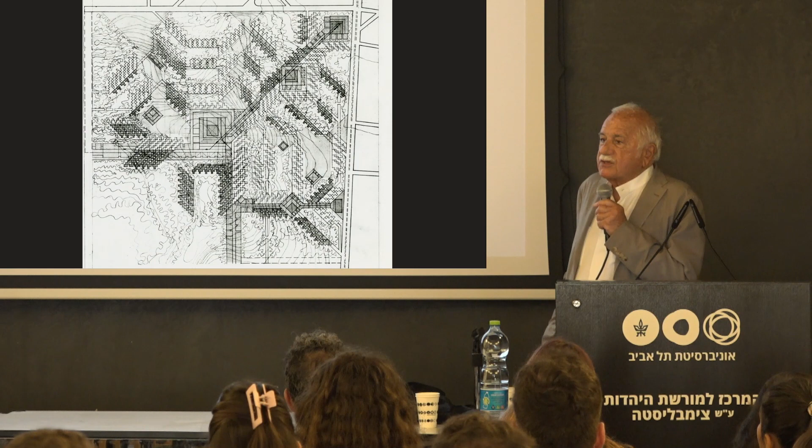This is a meeting in Washington with all the VIPs of HUD, Housing and Urban Development of the US, and we began working on a site in Washington, a hilly site, in which I decided to try and build within 12 stories prefabricated modules. They would be smaller than the Montreal project and lighter.

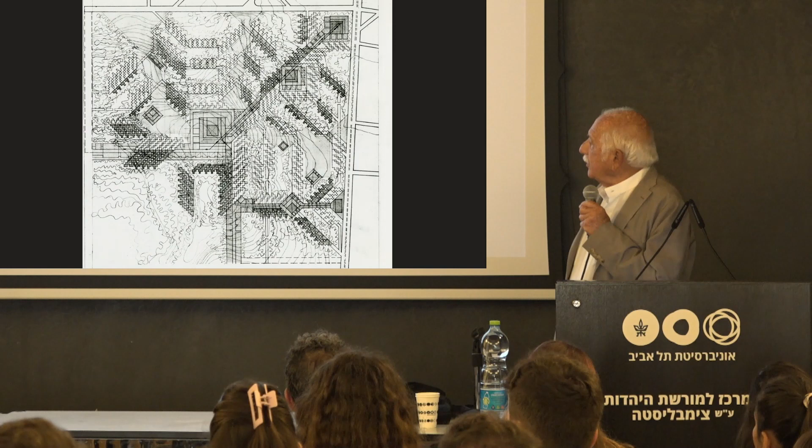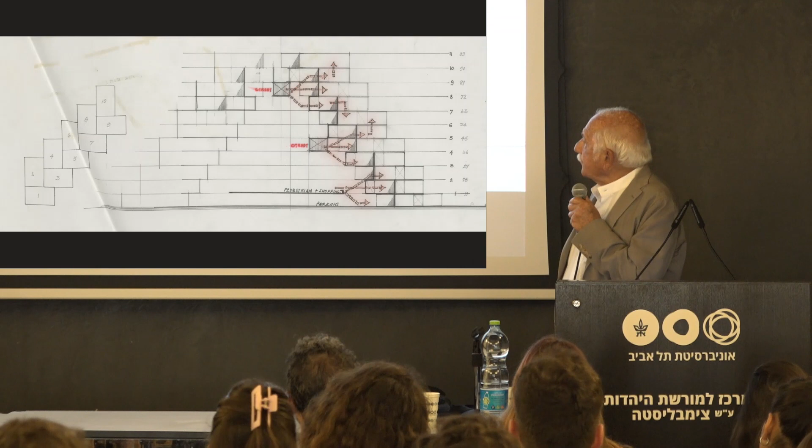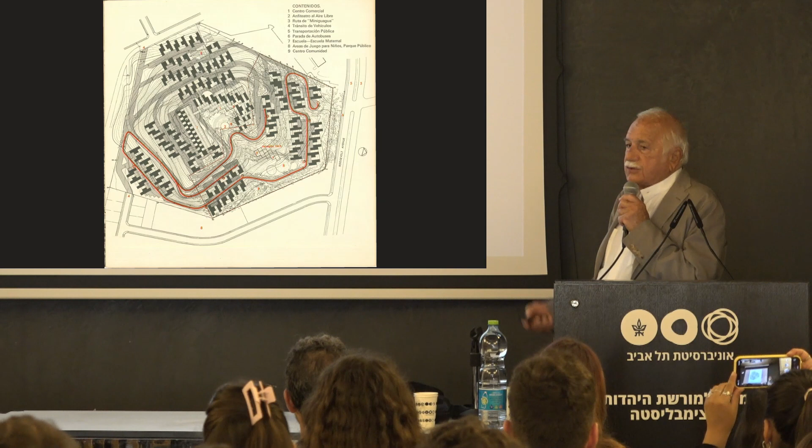Here I developed a split-level module. The walls of the boxes were 3 inches, even lighter. This is the site plan as it rose up the hill. Here we had the advantage of the topography, so we didn't have to really build. You can see the section, cutting the hill so that you have the access roads. And then basically it's a 4-story building climbing up the mountain.

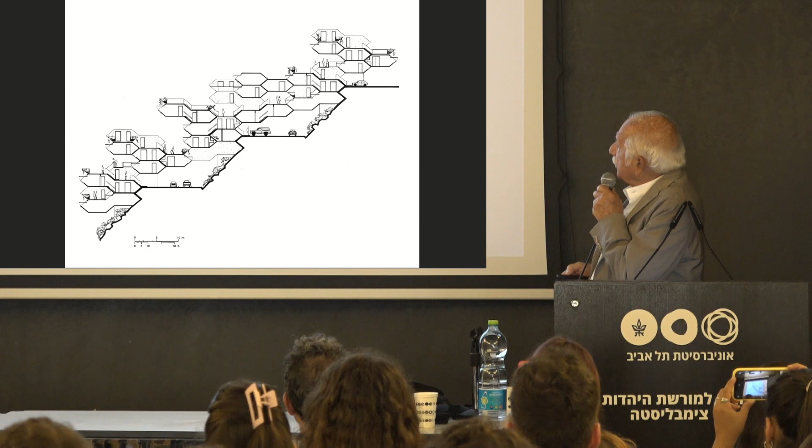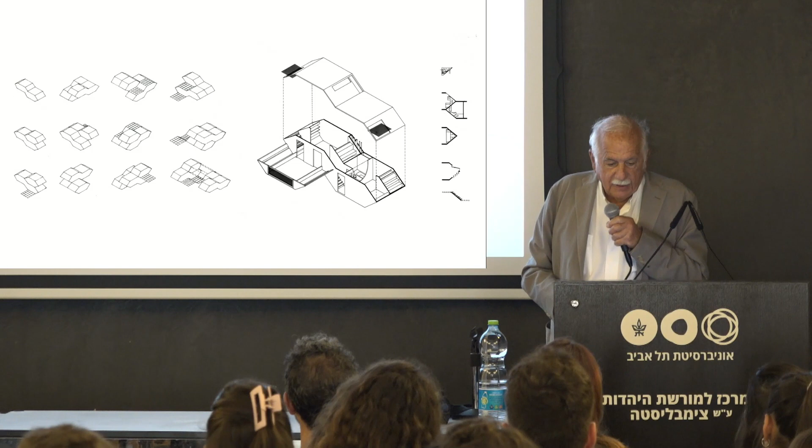The modules, the terraces, and the variety of apartments - everything was split level. How in our right mind we thought we could impose on hundreds of families to live in split-level housing is a testimony to our vanity at that point.

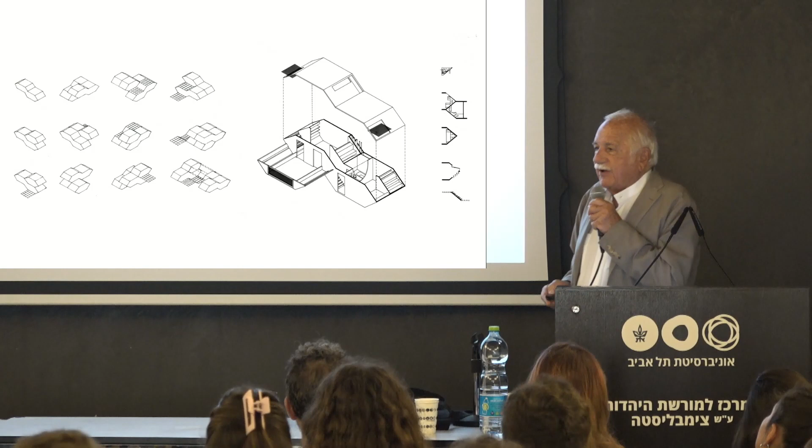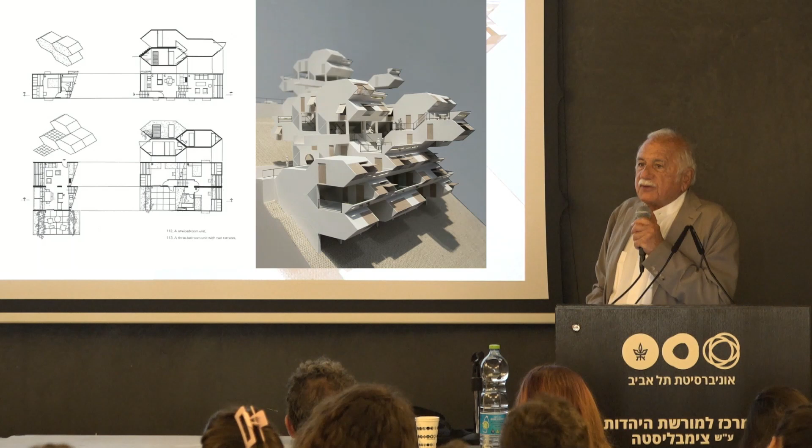There was something relentless about it, I would say. But the cluster was very seductive. Everybody has a terrace, some of them recessed. It's all designed to respond to the tropical climate. Everything is shaded. We thought we have a winner.

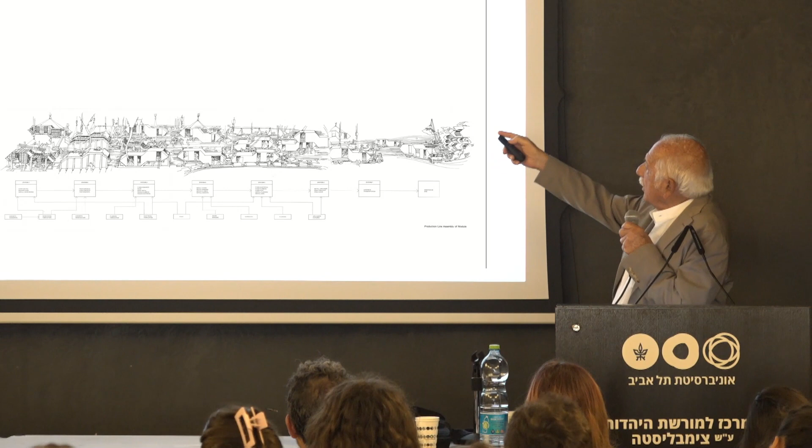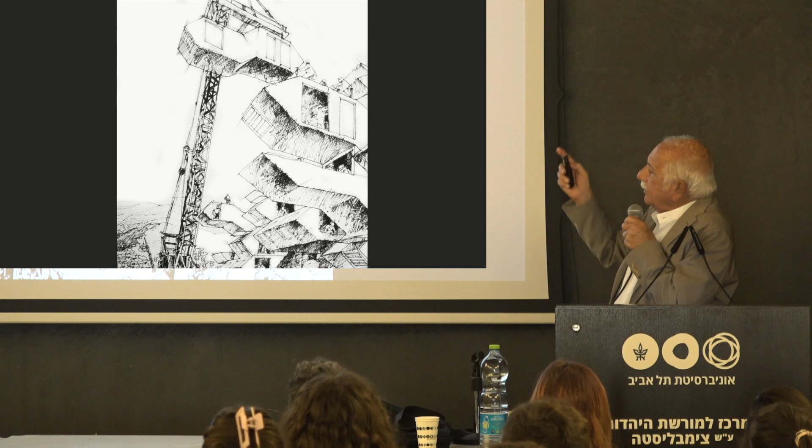So did the developer. We set up the production line, the factory, how everything would be assembled, the installation of all the components, lifting the units by simple cranes because they're only 30 tons - you could ship them by barge. And they started making boxes, producing and assembling them. This is the archaeology of that project.

So what happened? President Nixon of the United States and Romney had a fight over integration of housing - nothing to do with Operation Breakthrough, but Romney resigned or got fired, I don't know the full story. And Operation Breakthrough collapsed, so both the Washington project and the Puerto Rico project collapsed because all the federal funding for that research disappeared.

In '67, I was invited to the Congress of Architects in Tel Aviv right after the war. I was received by Mordechai Bentov, who was Minister of Housing, and Teddy, who at this point was the beginning of a long friendship. And we were commissioned to design a habitat for Israel.

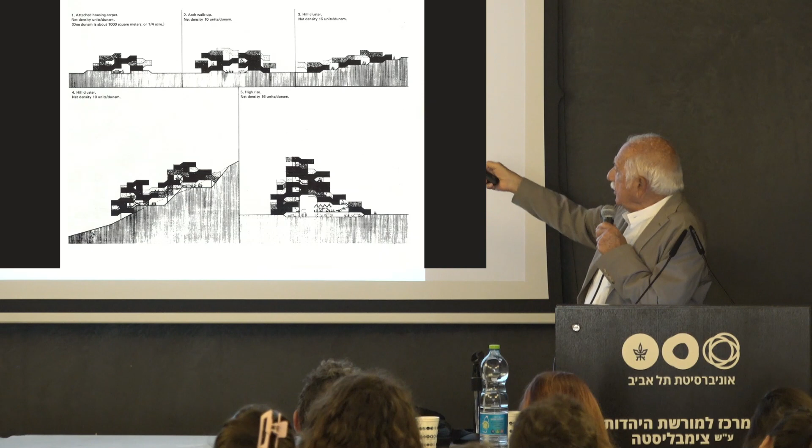The site was next to Manchat, the hill in Jerusalem. We developed a similar module, although here we developed a component, a system that could go from 3 stories for medium and low density to 12 stories. And we developed this window that could cover the terrace for winter or open it for summer.

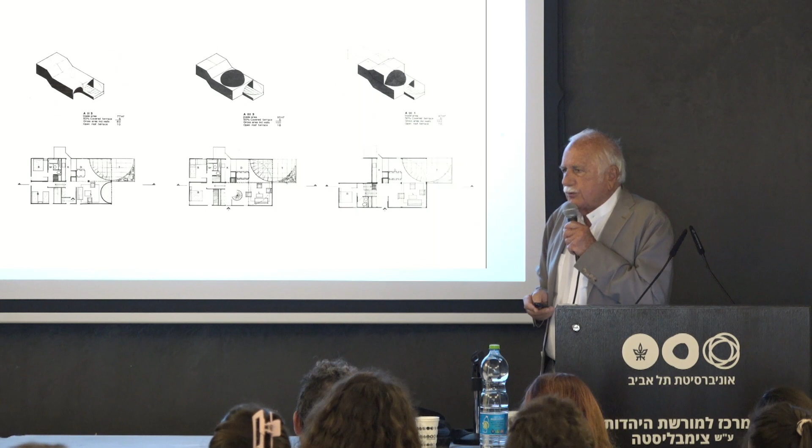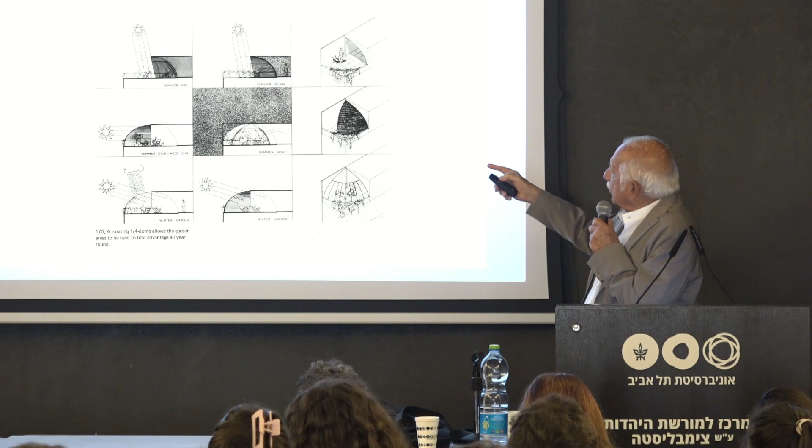You see here the housing types, and a whole team of engineers came to meet with, I think it was Ashtrom at the time, to set up a big factory. Here are the components of everything, and the window that allows you to shade it, enclose it for winter, or open it.

The only one that ever got done is in my apartment in Jerusalem, which you see here. That's on the hill of Manchat, something like 1,500 units. And that did not happen, primarily because at that point all the energy went to the neighborhoods outside the expanded city limits, to Ramot and Gilo, and Manchat was within the Green Line, so it did not have priority. Then the government changed, Bentov departed, and this remained a dream.

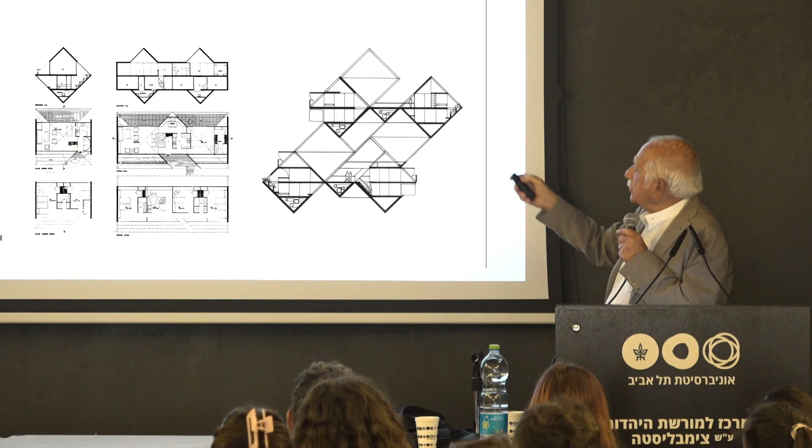Here we're looking at a steel module. There's the site, along the water and the highway, bridging over the highway. These modules were to be steel, so they could be lifted and brought by barge, so the size was less constrained. Large units, this was supposed to be a luxury project. We worked out all the details, very exciting, we thought, and that did not happen.

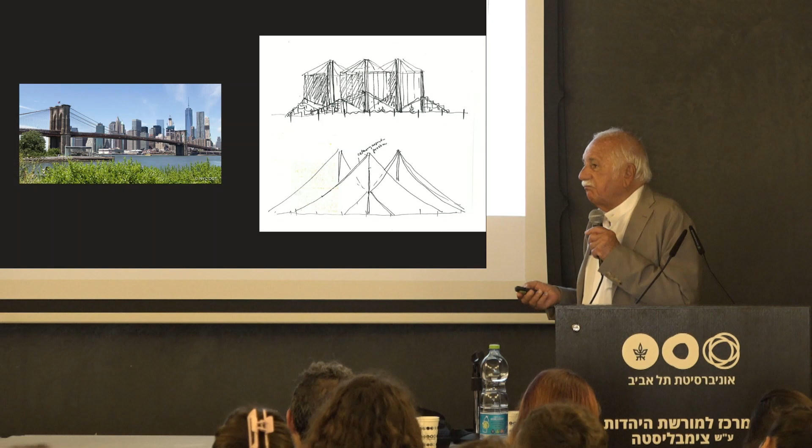Then Mayor Lindsay said, I have a site on the south near the Brooklyn Bridge, also over the water, and we thought, let's try suspending the modules so they have no weight to carry except themselves. They'd be much more standardized.

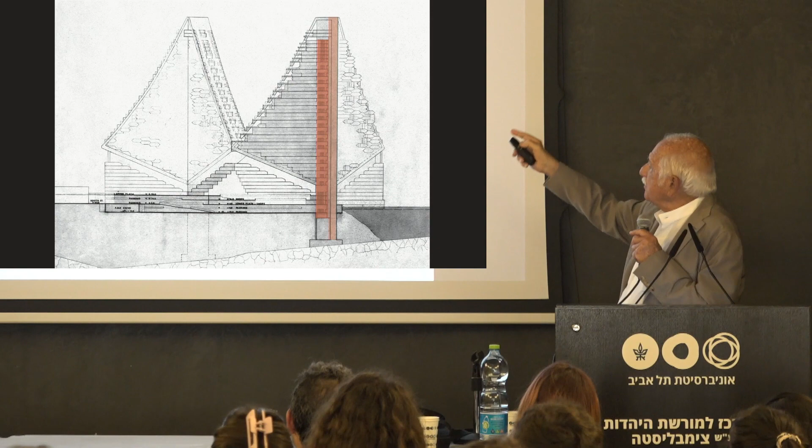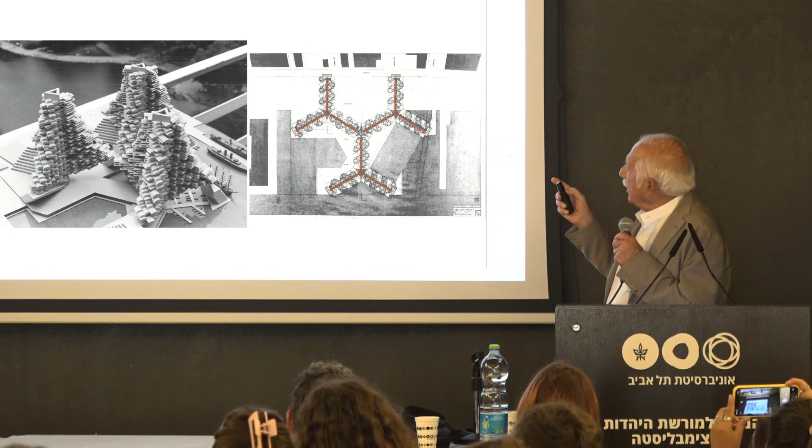So there are 3 pillars. There are cables suspended between them, appropriate to the Brooklyn Bridge. The modules, you can see, are lifted and threaded through. This isn't showing exactly the details, but the early model.

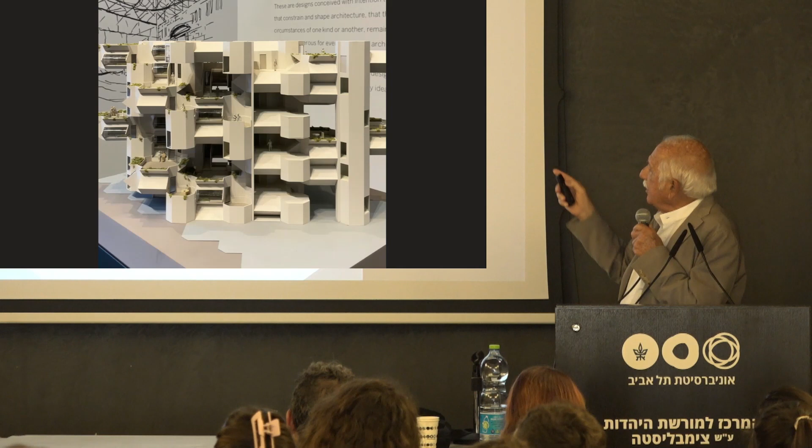And then we actually, you can see here how they balance each other. The typical unit, and a more detailed model made recently for an exhibition, shows the modules as they are hanging, 2 types of modules making up the whole clusters. That's a more recent model showing the whole system with the cables.

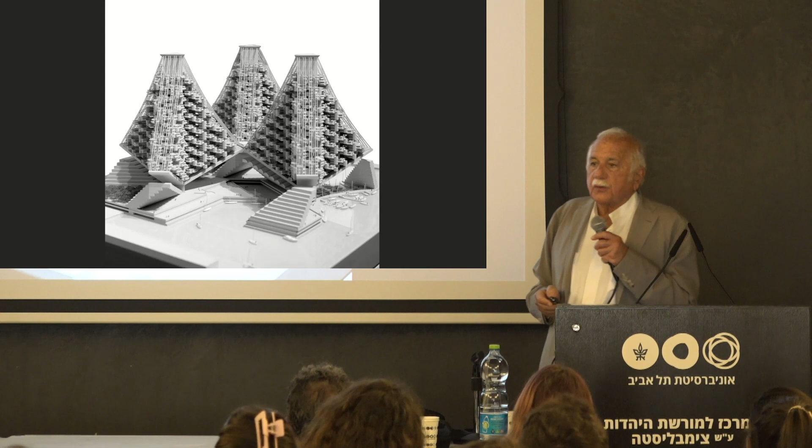Actually, this was engineered, and we went into great detail. I worked with T.Y. Lin, who was expert in suspension structures.

Everything was an issue. The unions were an issue. The building codes were an issue. And slowly we began to realize that what you could do in a World's Fair doesn't exactly happen in the world outside the World's Fair so easily.

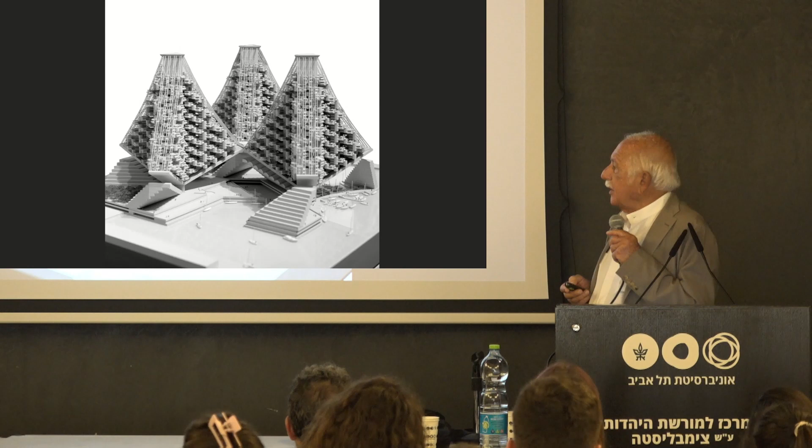You can see here the texture of the modules and the cables coming through. Audacious, but a bit beyond the capabilities of either the industry or the market. So it was clear that we were pushing things too far.

But then, at that point, in the late 1970s, any kind of housing, there was a recession, and there was hardly any new initiatives in housing, either public or private, certainly not in high-density housing. For the next 10, 15 years, you couldn't find a building done by an architect that was really a high-rise apartment. It really happened much later when developers discovered it's worth hiring architects with reputation to do apartment buildings and housing.

But I realized at that point, and I want to talk about the cost of fractalization. What do I mean by fractalization? The conventional apartment building is an extrusion.

And the reason it is an extrusion is that it's the most economical way, minimum envelope around the mass that you can have. Even balconies are kind of an intrusion on the extrusion. So if you want to create a form that is the most economical from the point of view of just construction, you extrude the building. You don't come in, you don't come out.

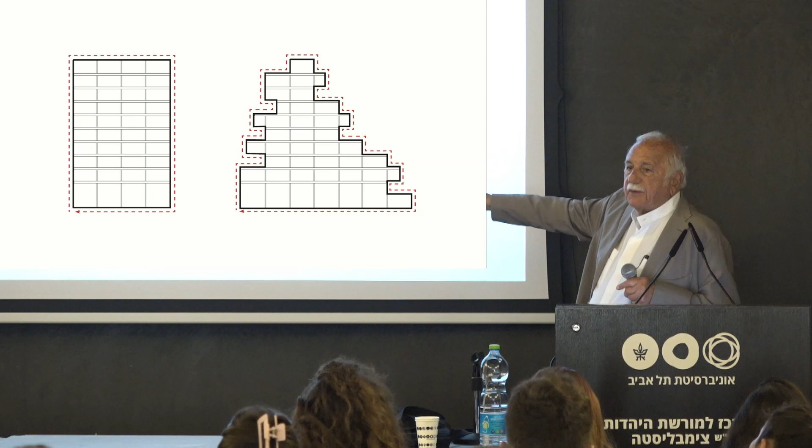I met at that point, in 1980, Mandelbrot. Mandelbrot at that point invented the mathematics of fractalization. Basically, I'm showing you a diagram that's architectural. You take that extrusion and you do what we do in Habitat, and you're getting more surface, more underside, more insulation, just more surface. So fractalization does not come free, and that is important to remember.

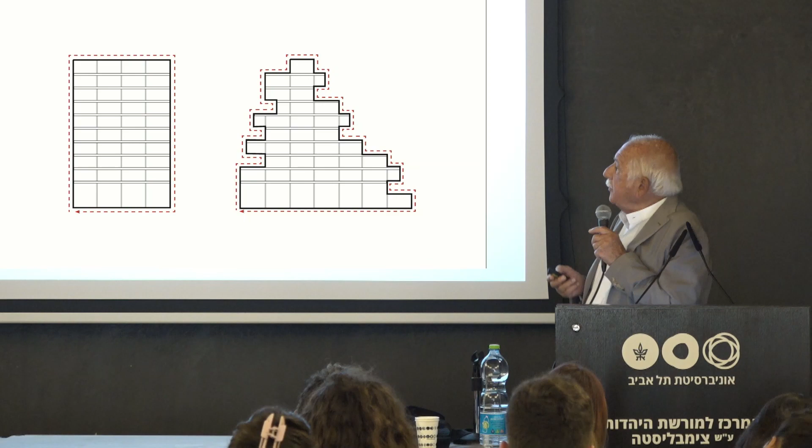These are amazing. Anybody know the term fractalization? Is that familiar? And Mandelbrot, familiar? He developed that, and we immediately recognized the connection between what we were doing and this amazing world of chaos theory and fractalization. So it's very important to clarify.

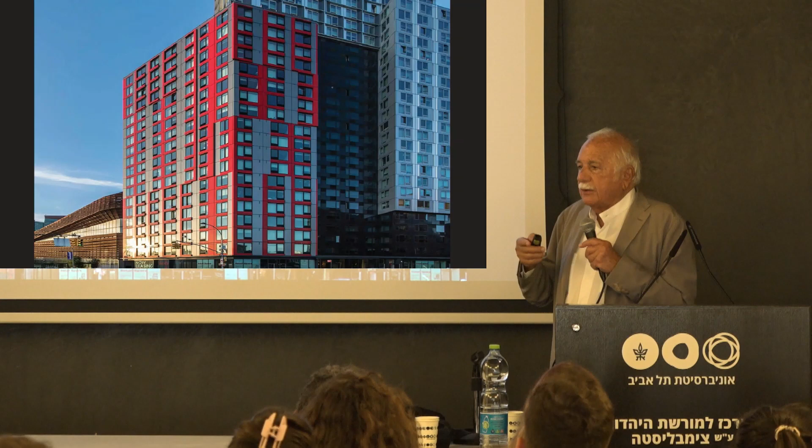You can have prefabrication, modular, factory-produced modules like this and create this kind of building. So modular construction does not mean necessarily a building that has gardens and terraces and so on. You can do either.

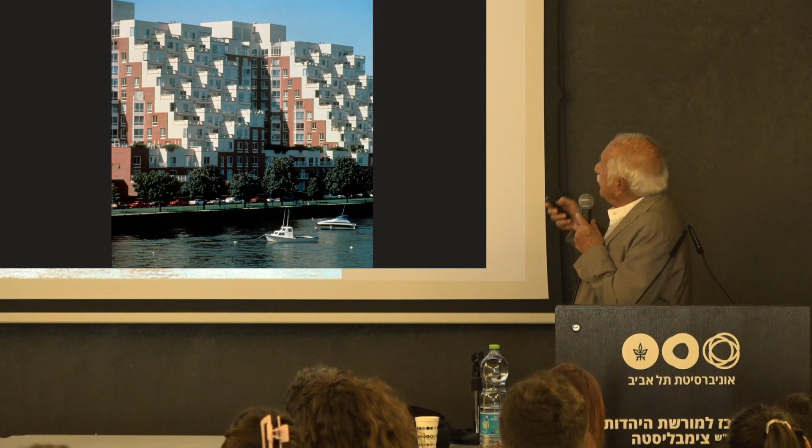In reverse, this is a building I built in 1980 in Boston, an apartment building on the Charles River. This was totally conventionally built, like any apartment building, concrete, conventional construction, but it has terraces and it's fractalized. It was done in the framework of a developer, for profit, but it's not modular construction. It's conventional construction with innovative features in the design.

It's interesting that just as I finished doing Habitat, several architects started doing things similar. Paul Rudolph was the most imaginative.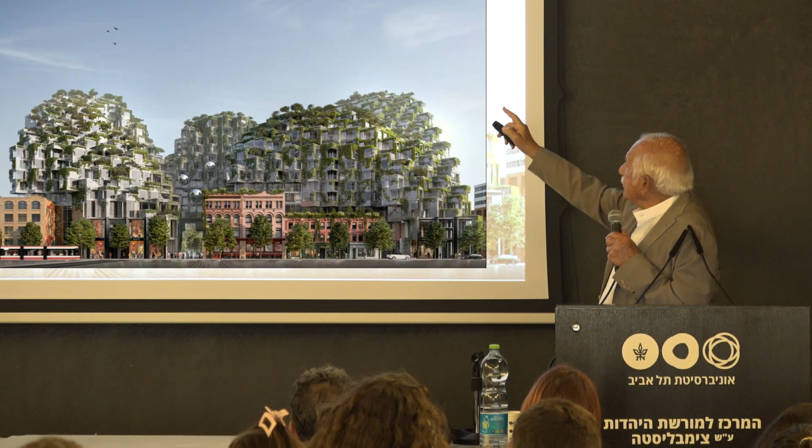And this is more recent. This is Bjarke at BIG in Toronto. He calls this Habitat 2. While this looks pretty good, you know, terraces, gardens, and lots of green. Whether it's going to grow in Toronto or not is another question, but lots of green.

But if you look at the plans, and I recommend you look at the plans, I'm not going to show them, it's a long, long corridor, square, with some nice apartments on this side with gardens. And on the other side, you have apartments looking into the courtyard. And instead of streets, you have these long, long, long corridors.

And so this brings me to the question of equity.

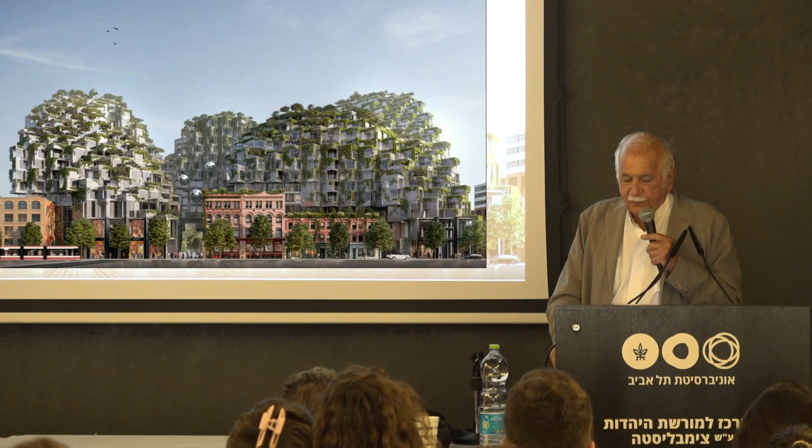Equity, I mean, when you design a building, particularly housing, it's very easy to produce a complex where you have Class A space, Class B, and sometimes Class D and E. And when I look at recent plans of famous architects doing housing, I'm not talking about the run-of-the-mill stuff, you often see an absence of equity.

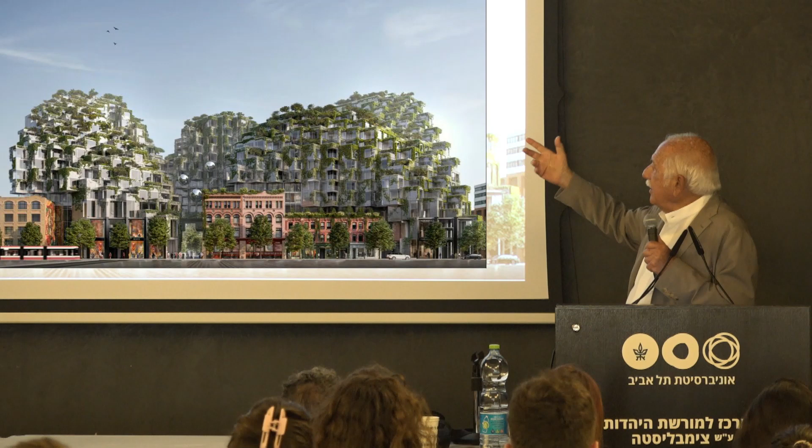One of the things that drives me crazy is to see a building such as this, which actually has some wonderful features. By the way, this is conventionally built, and it's now being built, that 50% of the units are really not wonderful at all. So I urge you to have that in mind. When you design a complex, equity becomes a big issue.

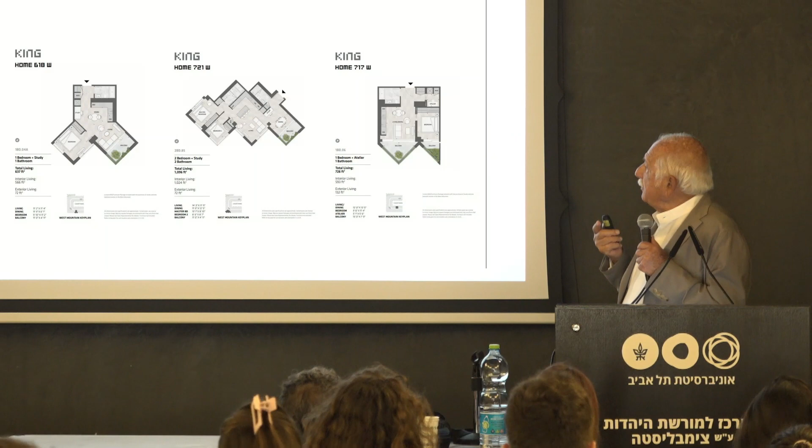These are the apartments of this project. And I didn't show you the plan as a whole.

So by 2009, after 20 years of doing almost exclusively only museums and libraries and courthouses and Mamilla and Yad Vashem and this and that, we said we have to come back to the subject of housing.

We have to come back to where we left Habitat and see what we might do. But I realized that doing so with clients is not going to go far because we had no clients. And so we set up in the office a research fellowship. We had 3 architects assigned to it, actually from outside the office. We advertised and got 3 people from outside the office, and then worked with other people in the office.

And the criteria was the densities of the 21st century, densities of Hong Kong, and this is, again, Hong Kong and Singapore, the densities of the most dense cities, the mixed-use issues. And after a year and a half of work, these are all the models we made in the research fellowship. And I'm going to show you 2 or 3 of the systems we selected as the most promising ones.

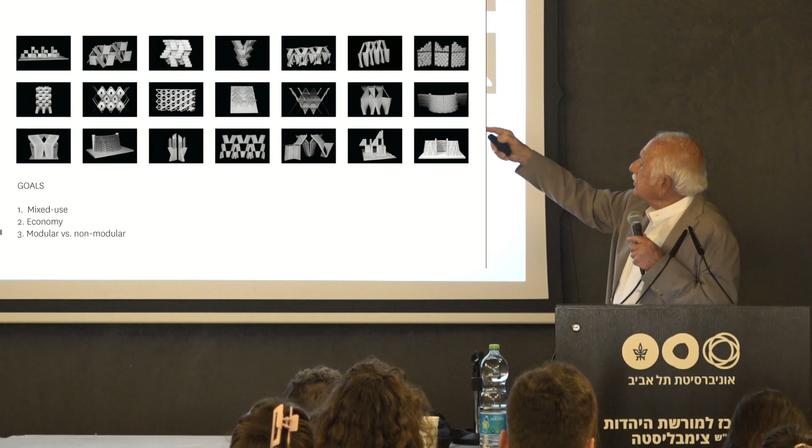Each had a different criteria. But these are all the models and all the systems we developed in some detail, and we got all our engineers to volunteer their time and work with us on it, so that we had also the technical input to make this for real.

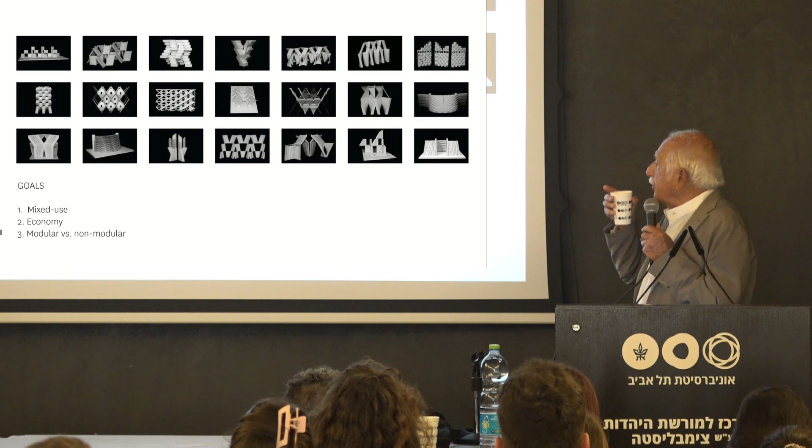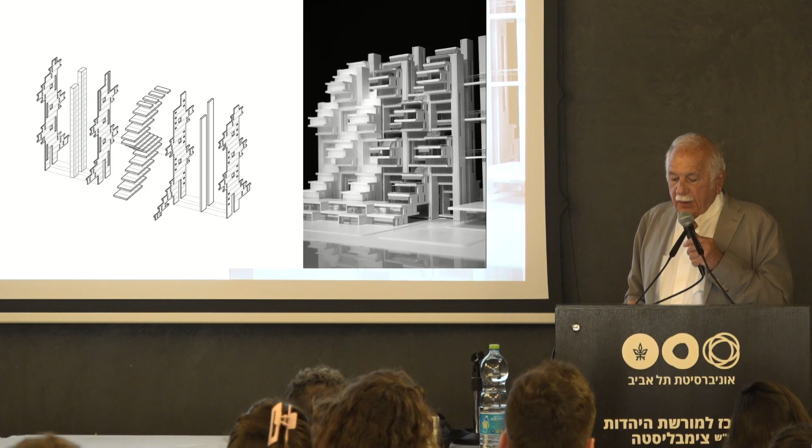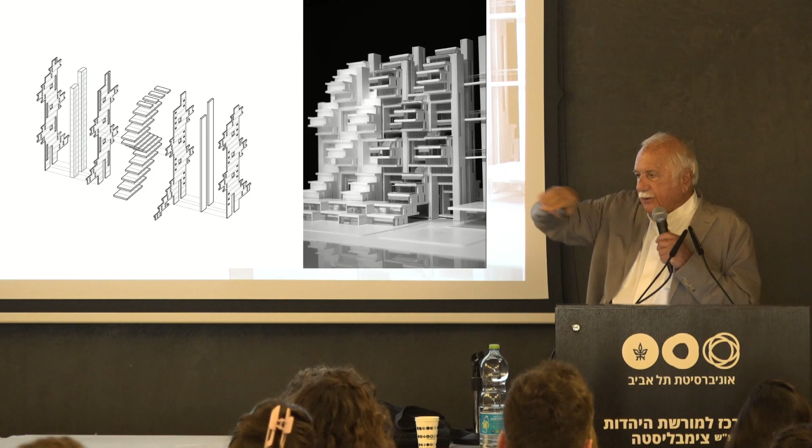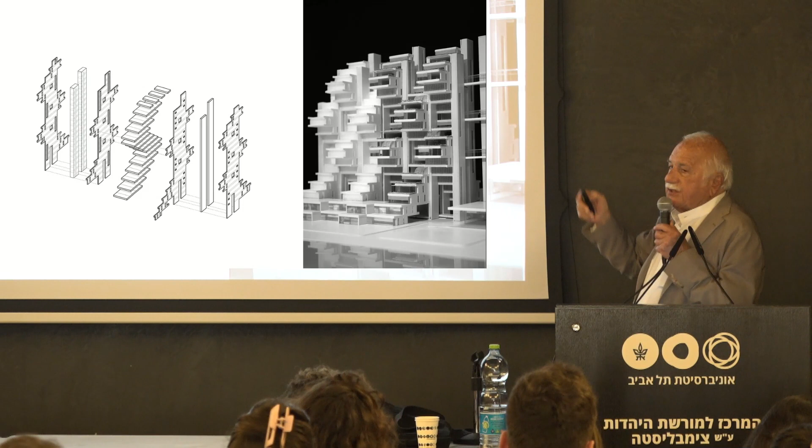The first study, we said, let's simplify Habitat to the point where all the structure is vertical and all the plumbing is vertical. Let's not do this, this, this, this. Let's go vertical, but we are able to go in and out, cantilever in and out of the structure. And we placed pedestrian streets every 4 floors, as we did before.

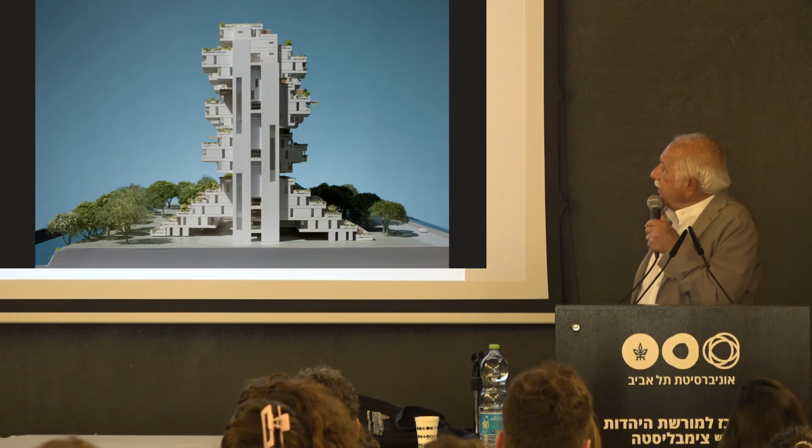That's the profile of the building. And we said, well, all the forces are going to the ground, the plumbing is going to the ground. We're achieving here great economies over the original prototype, but every unit has a garden, and we have multiple orientations, which is maybe a compromise, but acceptable.

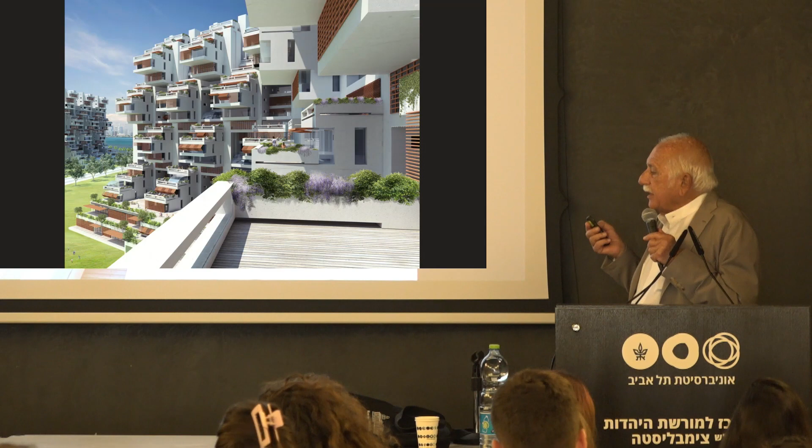And we have a great diversity of units possible, and that's the building that came out of it. And you can see that it texturally and in terms of the availability of outdoor spaces and so on is very much like Habitat, but it is an individual building still. It is a singular building.

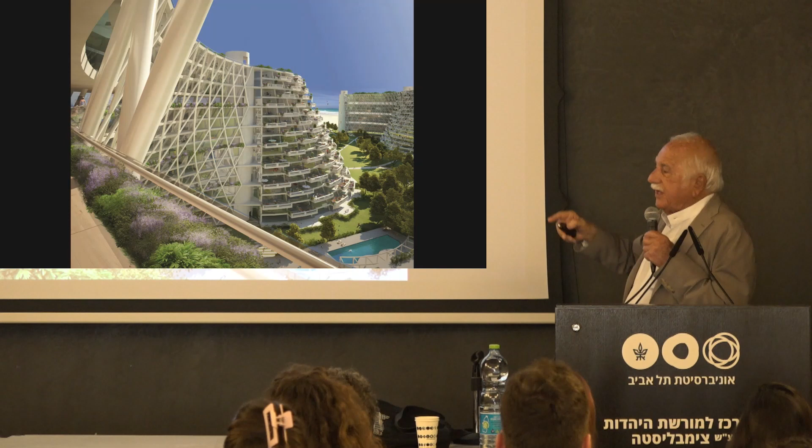And we then moved to the idea of membranes, but with the simplification, without the A-frames, we made the membranes come back to a vertical line so that it could be supported by vertical elevators. And we figured every tenant can be given space within the sandwich of the membrane, light on both sides, and they can design their own apartment.

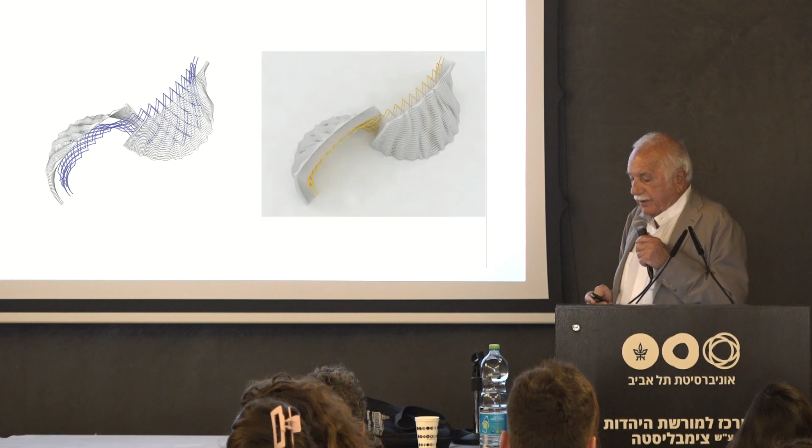And this actually achieved quite an amazing density. And it was industrialized, but not modular, because you had platforms, as you can see here. And you can see the geometry resolving itself on a vertical elevated line, as you can see here.

Then we went to jump scale to the A-frame scheme, but again with membranes that are continuous and therefore very much economical with the terracing. And you can see it here and at the larger scale. And finally, we mixed offices with apartments in a 50-story structure with retail, both of the 25th level and street level.

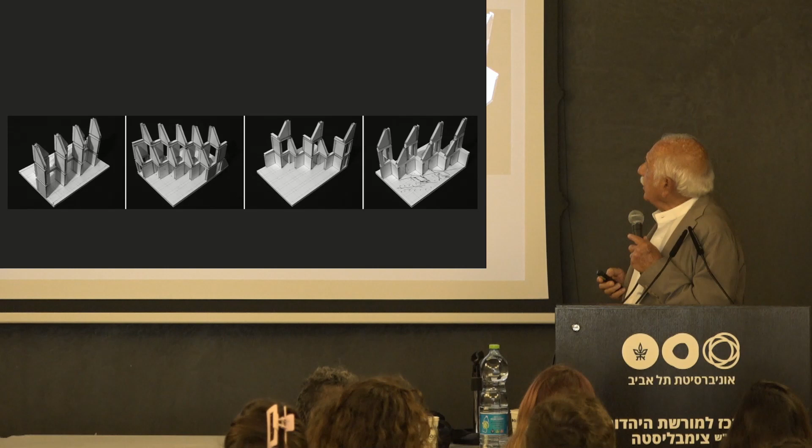I think the most interesting was a study in which we decided to equal the density and mix of Midtown Manhattan. We took several blocks of Manhattan, mapped the mix of offices, apartments, and retail, and reorganized it with offices occupying the first 25 floors and housing clusters occupying the next 50 floors - a 75-story cluster with large urban windows, which means that when you develop this along the river or the park, you will not create a wall, which you see here in the model, the plan, and the renderings.

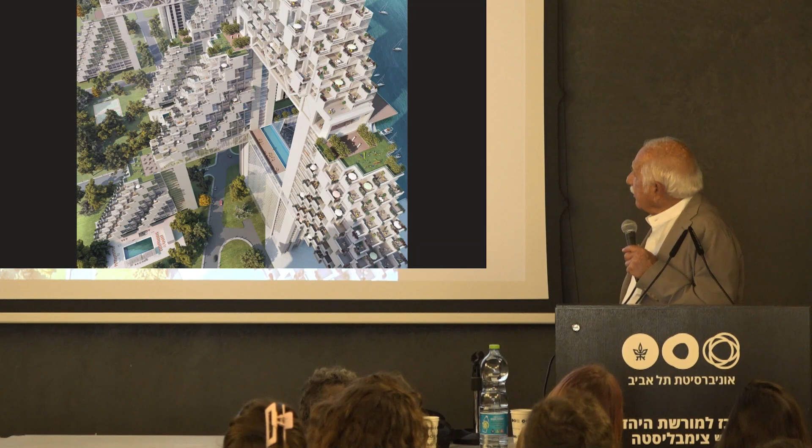So here you have multiple private terraces, but you also have a great deal of public outdoor space. On the 25th level, you've got this continuous community street, which is the interface between housing and the offices, plus the public street, which you see here.

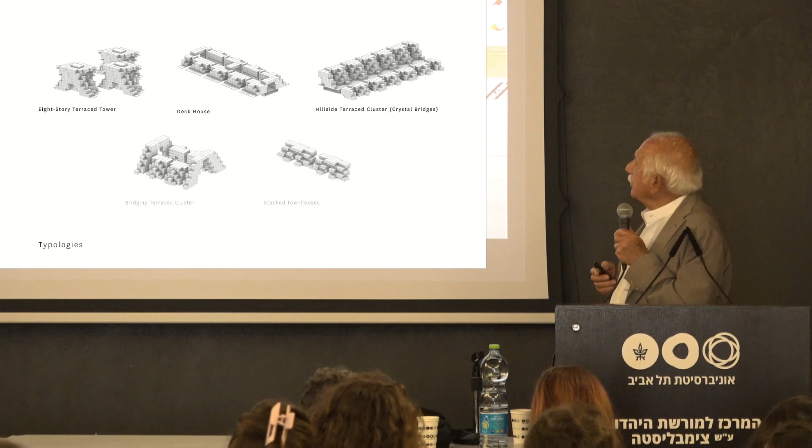The other area we concentrated on is timber, which in the United States and in Europe is plentiful, and there's the new technology of cross-laminated timber. It's like plywood, but much cheaper - it takes very cheap wood, small pieces, and laminates them into very strong panels. This is a factory we've been working with, which produces timber modules that can be stacked up to 8 stories under the American Building Code. We've developed modules that go from a few floors to 8 floors, with considerable densities, completely done with wood and very sustainable because it comes from small trees.

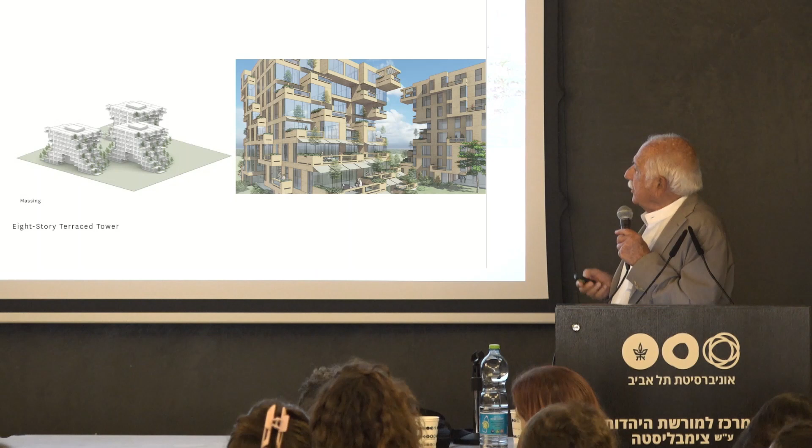So what happened is we had these schemes. We didn't try to build them literally, but then we started getting new projects, and these schemes became like a mine in which we could go back and ask: what's applicable?

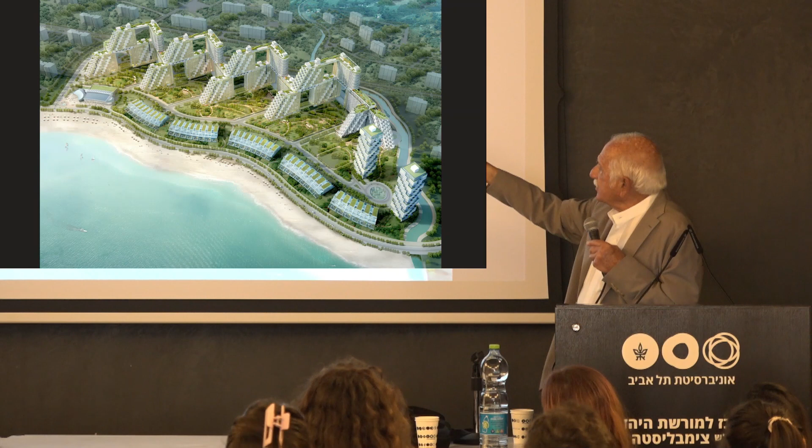This project is in Qinhuangdao, China, 3 hours outside Beijing. It's on the sea, with considerable density. The mayor of the city said we could develop the site as long as we don't block the sea from all the units behind - there's a lot of development behind there. We had some villas on the seafront, which then somewhat became retail.

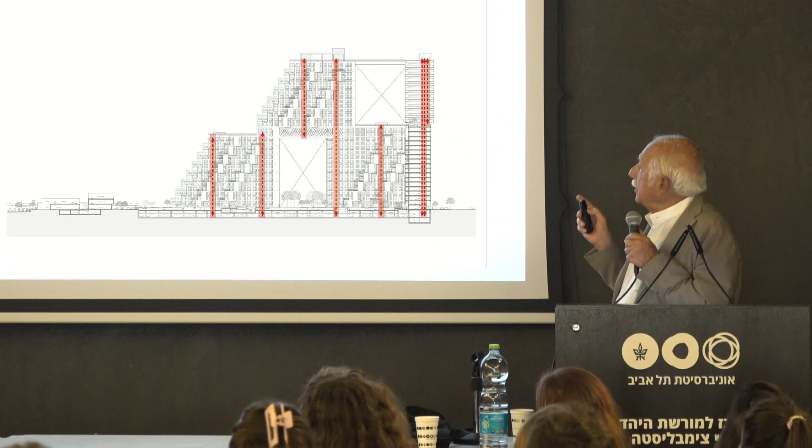This is a rendering, but this is now built - it's thousands of units, and we're just building the second phase now. It's conventionally built, concrete structure with steel trusses on the bridges, but it's middle-income housing. The idea that we're able to build middle-income housing in China with that quality is almost a miracle. This is the project as built - there's parking under it, lots of amenities, and you can see here the terraces, not very large, but still wonderful outdoor spaces.

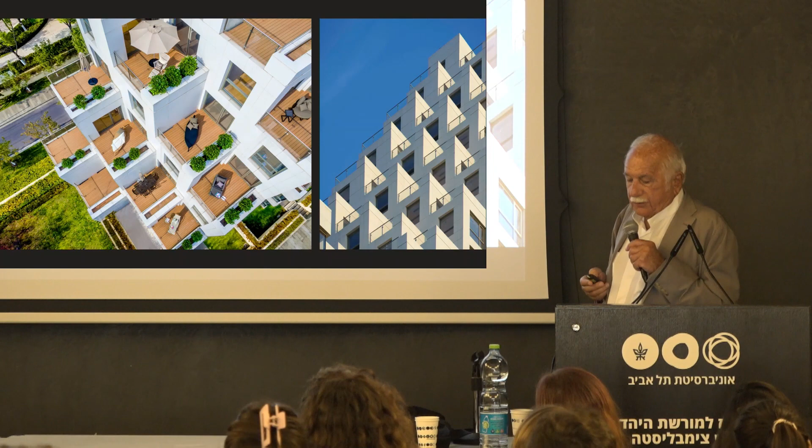As I said, we're expanding it now. More interesting, in some ways, is a smaller project in Singapore, which the client wanted to call Sky Habitat - we said fine, we even own the copyright for the name, although we never enforce it. This is again middle-income housing, not downtown at all, in part of a community.

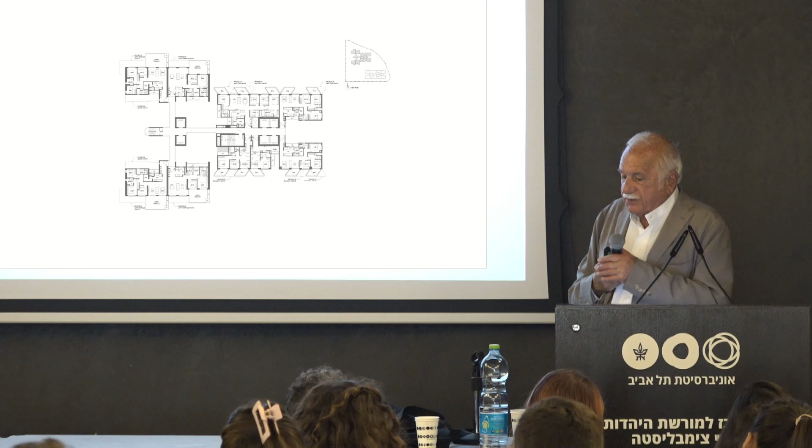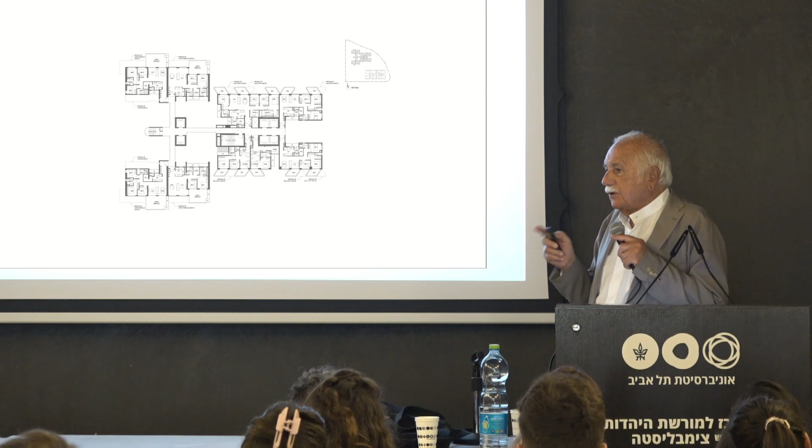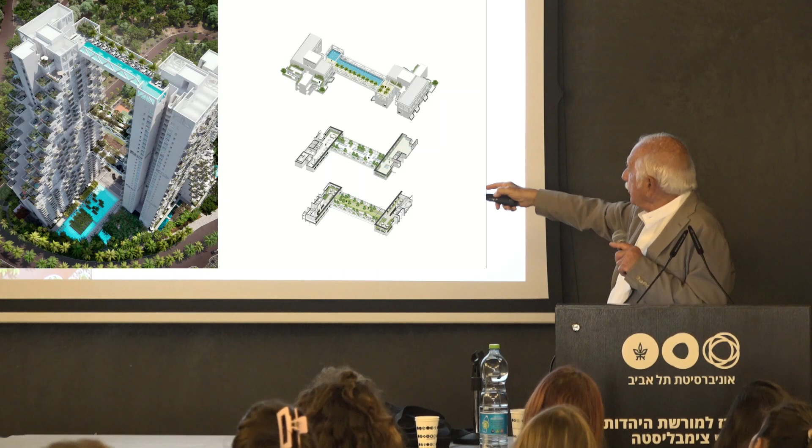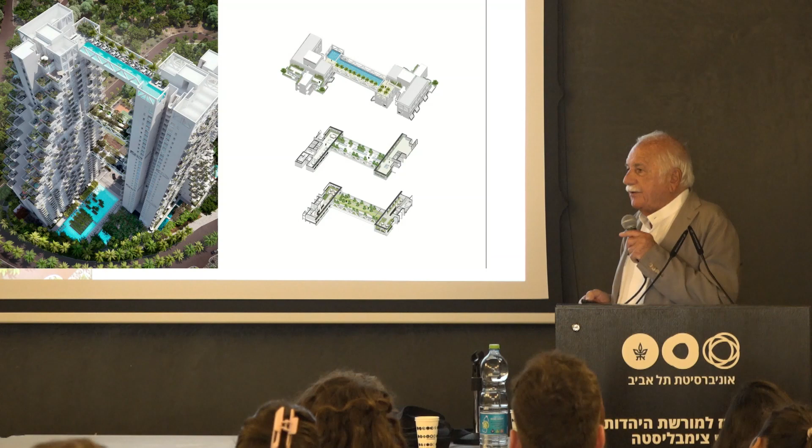What we did here is create 3 levels of communities which bridge between the buildings. We were able to get a fair amount of terracing, though not all of them terrace - some have balconies, some have terraces. Mitsubishi actually prefabricated the building, but in panels, not in boxes. These are the 3 bridge levels - every 15 floors we have a bridge. One has a swimming pool, playgrounds, party rooms, and there's lots of stuff on the ground. 600 families, must be at least 500 kids, and they really use that building. It's amazing, and it's a very high density, as you can see.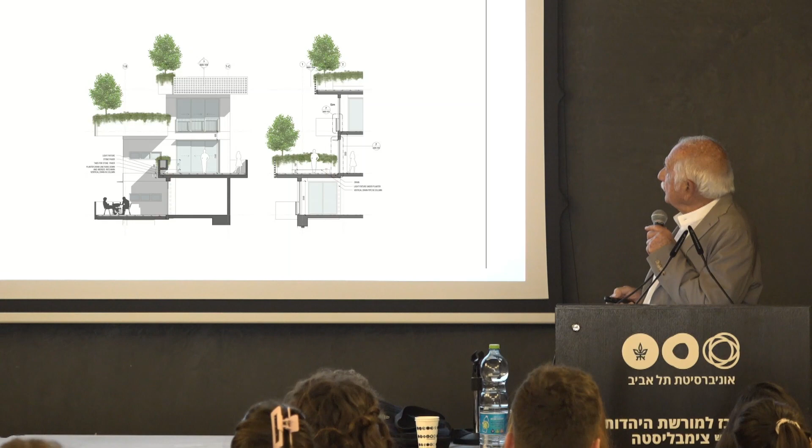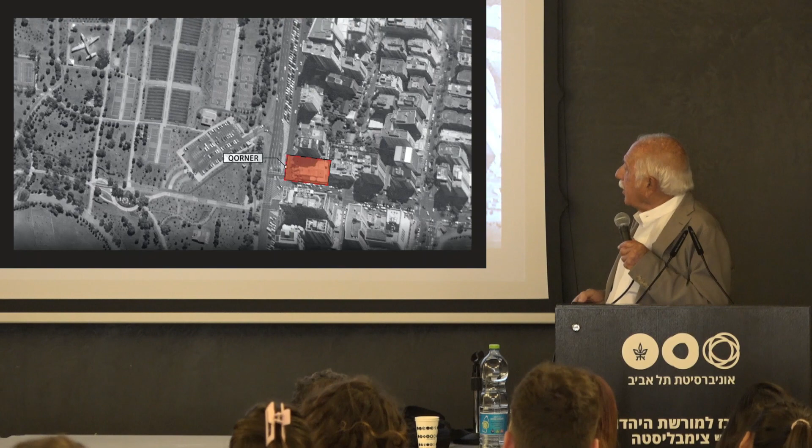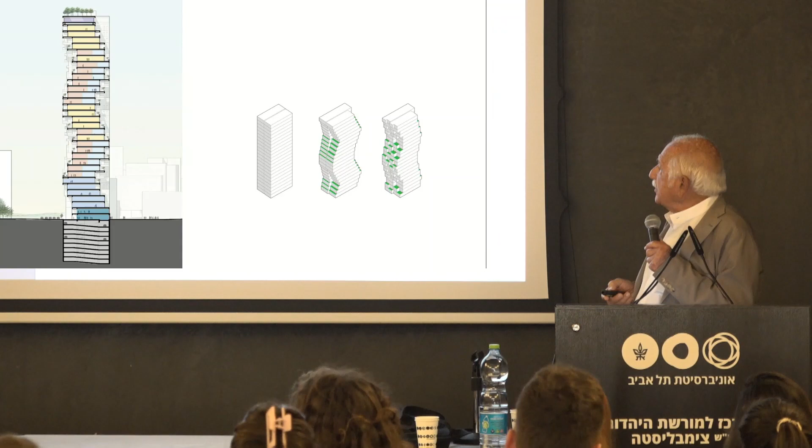In Ecuador, we were commissioned to do an apartment building on a tiny site, really tiny, along the park on the major city boulevard. Here we applied the in-and-out system that goes in and out, which you see here. Even though it's a tiny site, we were able to get 4 apartments per floor, each with its own terrace, with the zigzag in and out - again an application of the system, which you see here, and that's again middle-income housing.

There's a detail, and this just opened, just finished. These are shear walls, acting to handle the structural system.

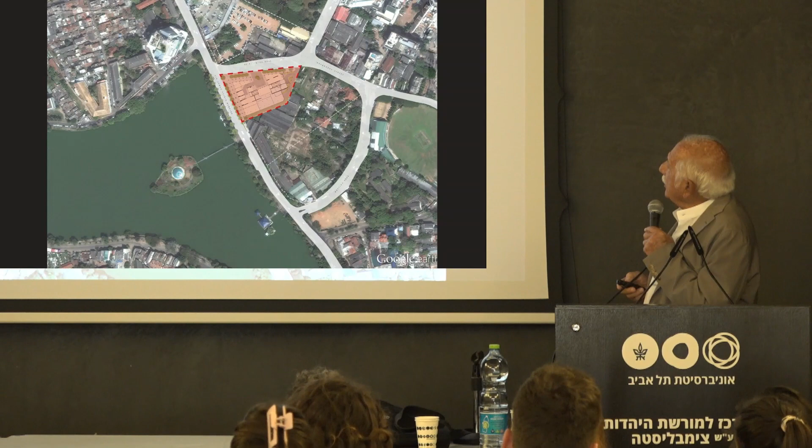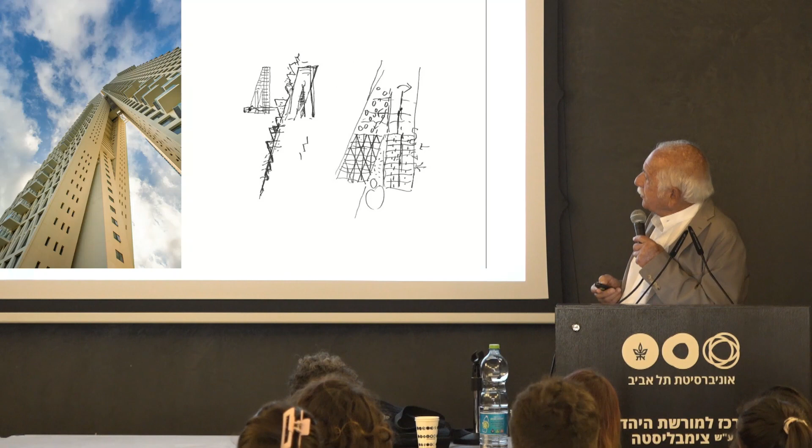Finally, on a site in Colombo, a 65-story residential tower, we leaned one building against the other so that the ones facing the lake have terracing and the others are more conventional. You see here how one building is supported by the other, with the cores and terraces giving you these kinds of apartments, each with its own roof garden. Beautiful city, Colombo.

This will lead us to tomorrow, if I don't lose my voice, in which we'll come back to the question of when you put towers together, whether they're residential or not, what are the forces that are acting from one tower to the other? In other words, how do you maximize views, sunlight, orientation, and all that as soon as you cluster buildings? And then I want to add the dimension of mixed use and look at a number of projects which try to cluster towers together, which is maybe the most common development model today, even beginning to be in Israel, but mostly I would say like Hudson Yards in New York and many projects in Asia, where one developer is building many towers, retail, housing together in one complex, and how one deals with the public realm and whether one can repossess the public realm. So we'll go from what's purely residential to the much more complex question of the fabric of the city and the kind of urbanism that it yields. And let's open it for conversation.

The dream of the habitat is to have a home, not an apartment, but a house in the sky, for density and community. And from your experience, because this idea kind of emerged in the 60s and then re-emerged in the last decade or two, you had a long time of incubation, and realistically, you said, okay, conditions are not ripe. But I will ask, when people live in the new habitats, is it more like living in an apartment, or more like living in homes that are clustered together, in terms of their perception?